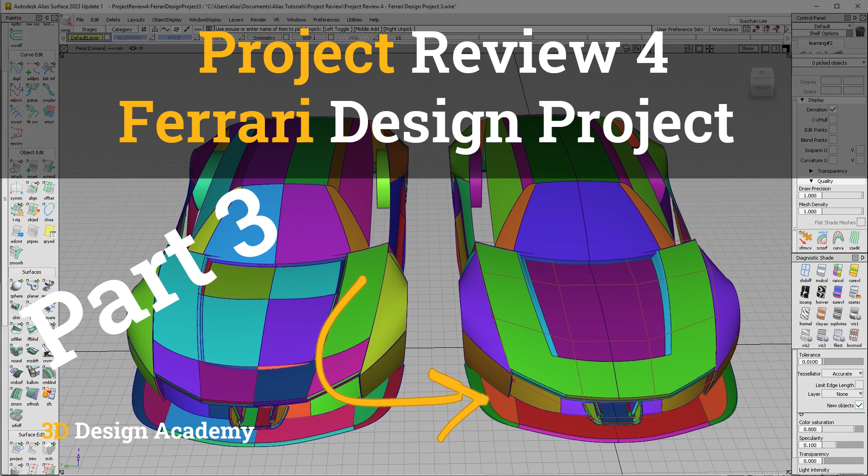In the previous lesson, I finished up by working on this fender over here. I'm going to make some modifications because there's a little bit of gap between the surfaces. I'm just going to leave this edge as is.

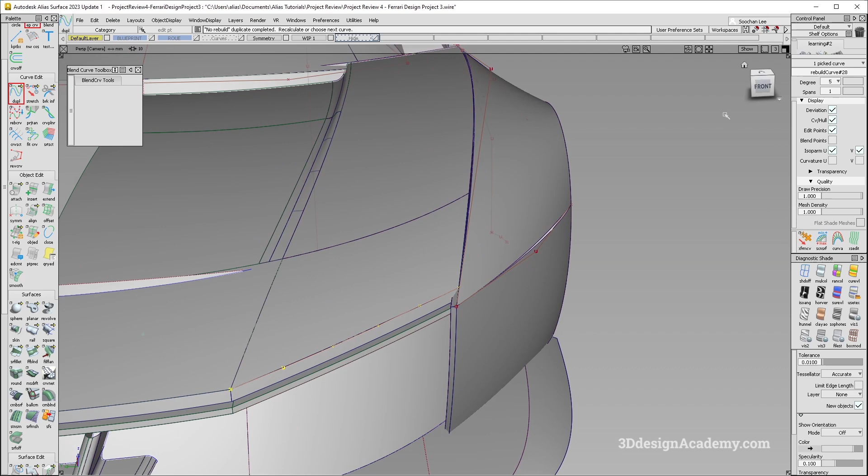I'm just going to duplicate this edge. Actually, let's see if I can extract the curve. Looks like the top one doesn't really have it, so let's do a fit curve like this. I'll make it a degree 2 to keep it simple, and do the same thing over here as well.

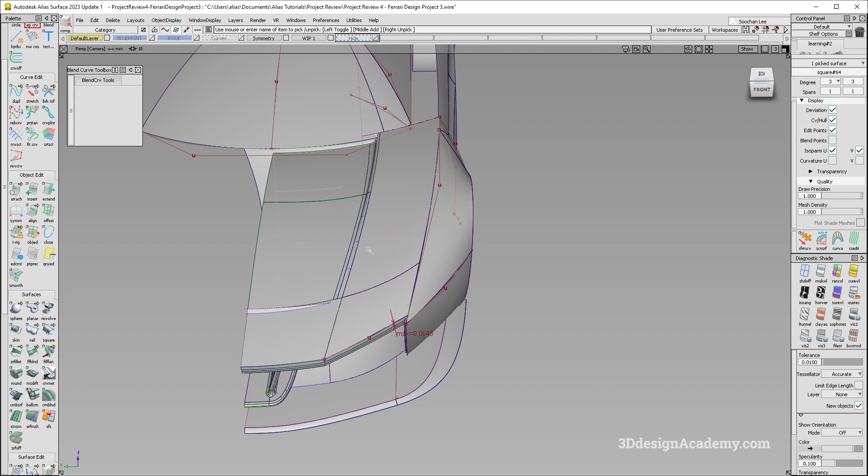Actually, I do have a surface over here, so I'll just use that. Now what I'm going to do is recreate it, because I have to refit the existing edge to the new one. I'm just going to delete this one and do a bi-rail.

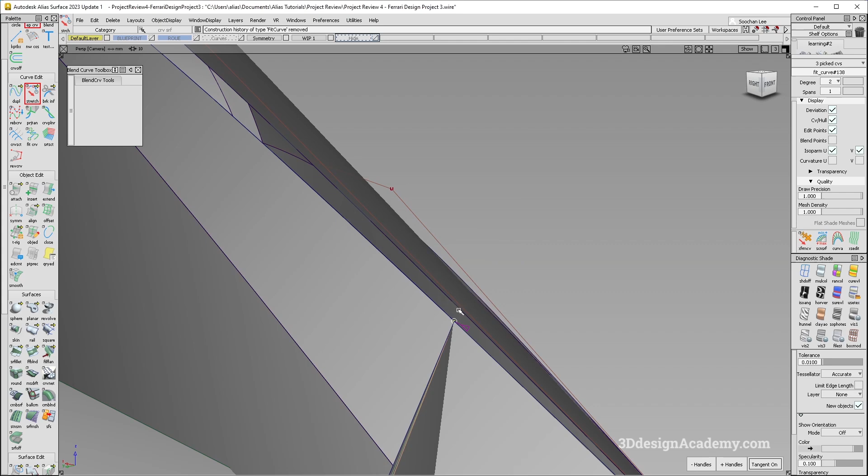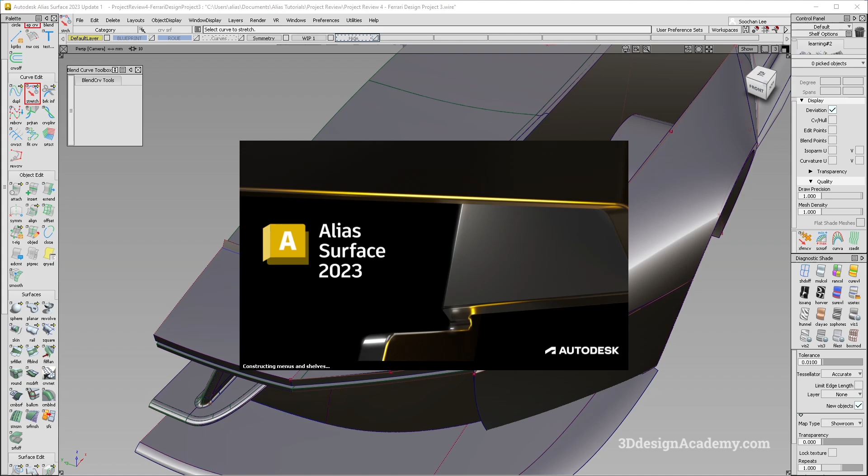I can't remember if it was supposed to be curvature or not, so let's start a new session of Alias and bring the previous one back just to check it. I shouldn't have deleted it, so let's just bring the other one.

I'm just going to check if it's supposed to be curvature or if it's supposed to be something else. Okay, so it looks like it is supposed to be curvature, which means I will probably make it out of one sheet. Let's just check the continuity over here. Okay, so it doesn't look like curvature.

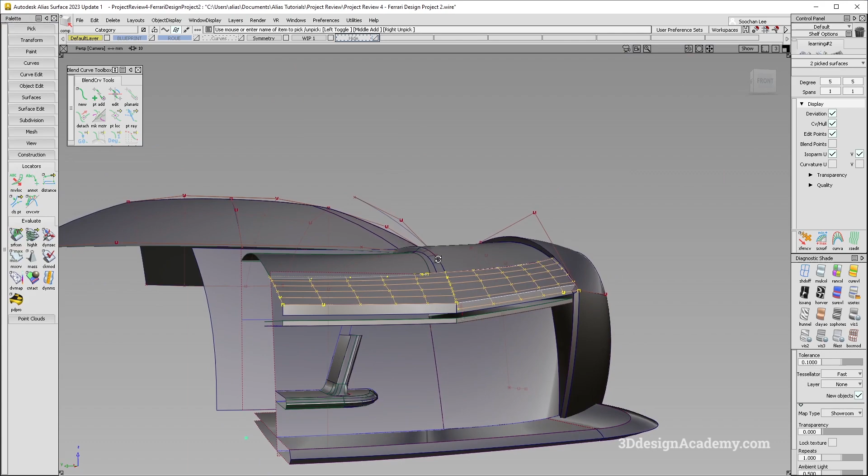In a case like this, I would actually build across the center all the way through, but... okay, so this one, that's a little bit interesting how it's built. Okay, so let's do this.

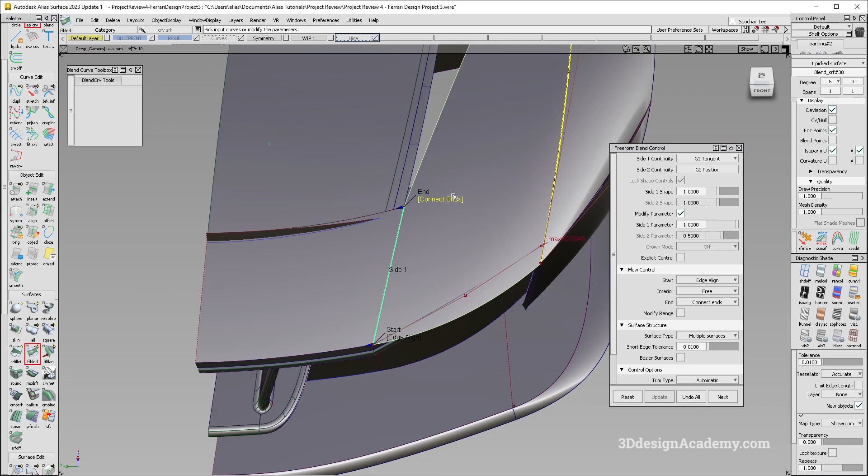If that's the case, what I'm going to do is align a freeform blend and go align it to this edge over here. I'm just going to say connect ends, I think connect ends will be best. And I'm going to say modify range, and bring it over here like this.

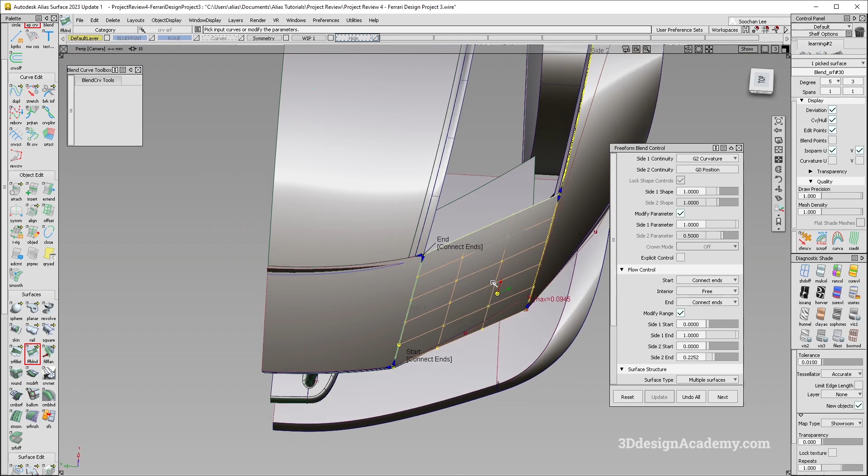For this one, you can do connect ends, it doesn't really matter. What I'm going to do is make sure that it's curvature on side 1 and position on side 2. Now that's where it looks like the CV structure is a little bit off. I don't know why it's doing that, could be because of the underlying structure over here.

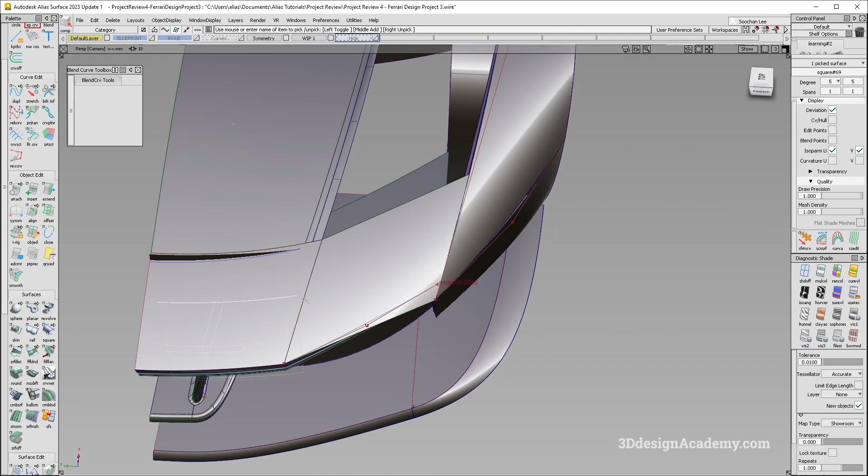So yeah, let's just leave it like that. Now, because of the difference here, it's probably going to rise up a little bit as it goes towards the outboard side, which is fine. But I do see why the creator of this model made a decision to patch this into 2 pieces. So if that's the case, I'll just leave it.

Let me just bring this down though, and delete the COS over here. Now, to recreate this edge, the only thing you have to do is just project, and I'm just going to go ahead and trim. In order to fill this space in, I'm just going to use a bi-rail.

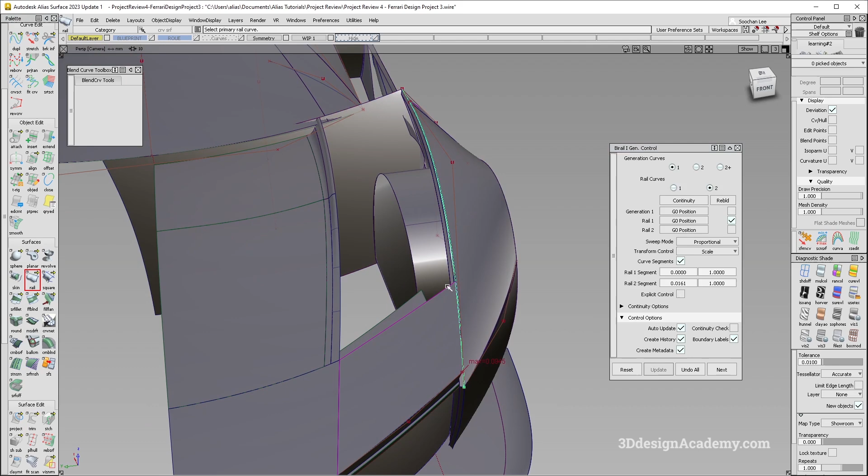So it's going to be 1, 2, and 3 over here, like this. I'm just going to use a curve segment to bring the edge back to essentially a similar location like that.

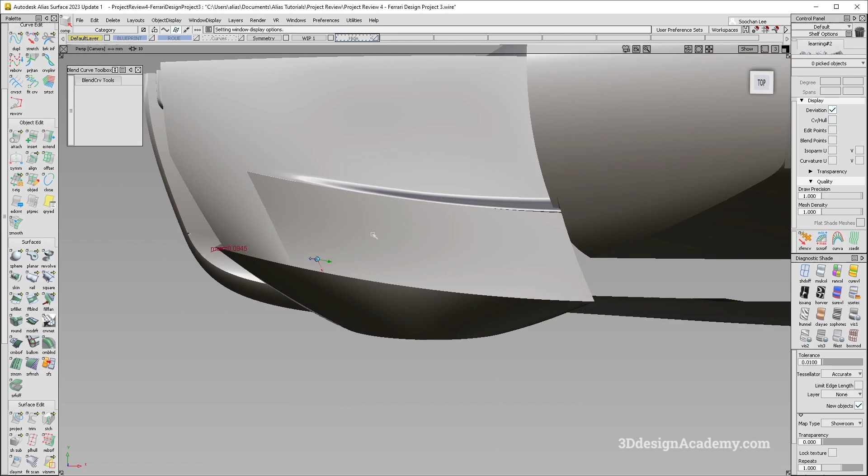However, with this one, you do have to be a little bit careful, because this does have to be curvature lined. Actually, if that's the case, let's do this. Now, here's a little bit interesting part. Actually, if this is the case...

This is where things get a little bit tricky. If I was to just make the whole thing out of one sheet, I think this would have been easier, but because it's actually segmented, I don't know if this is the best approach. So let's do this.

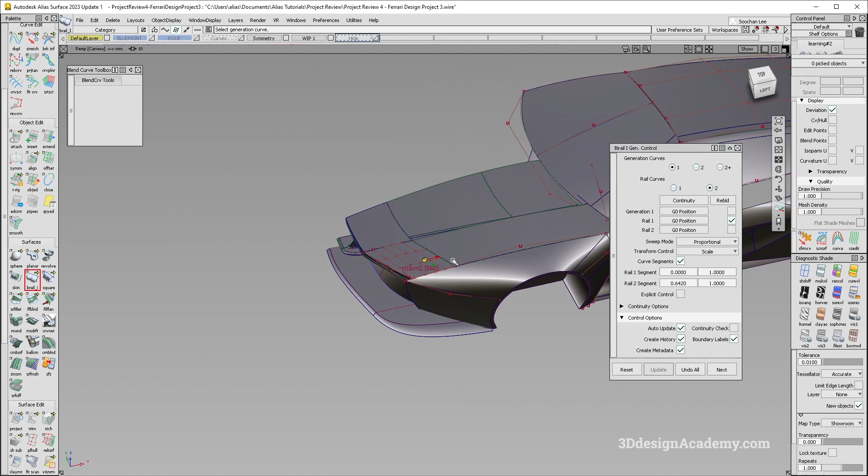I think I'm going to make it out of one sheet, just to keep things simple. Because right now, if I were to align this curvature, let me do an explicit control and make it out of maybe 5 degrees like this. And if I were to just do curvature on this one, it's going to sink down. Well, actually, it's not that bad.

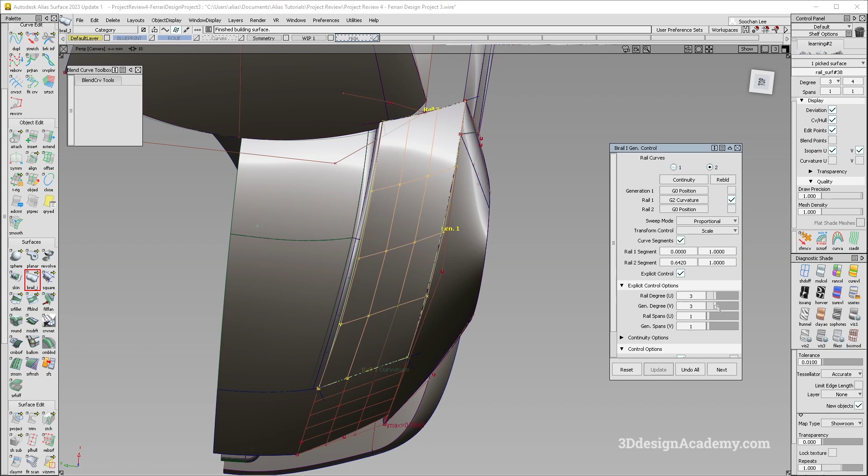Okay, I'm just going to make it out of degree 3, and this one is also going to be degree 3. Oh, okay, so it does do this. Yeah, never mind. Well, if I actually... it would be ideal if I make the whole thing out of one sheet so that it's just a clean build.

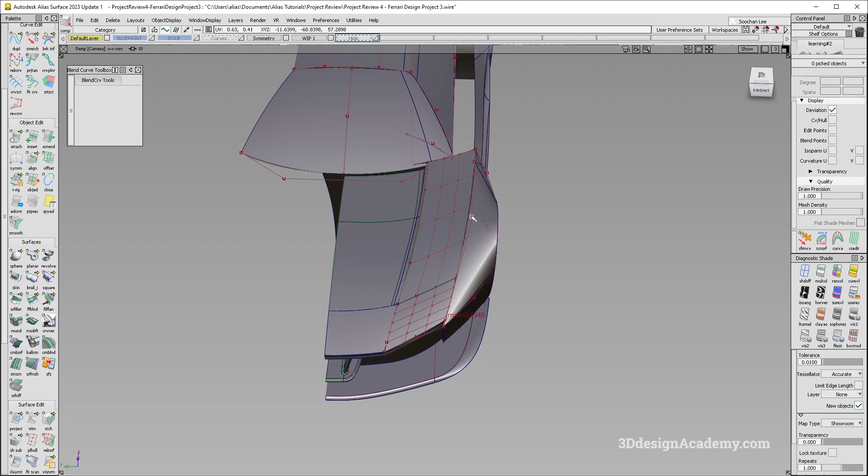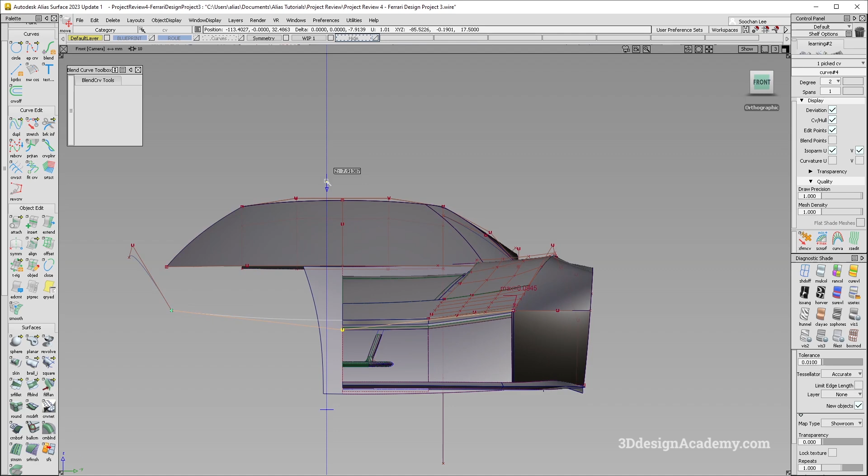So what I'm going to do first is duplicate this over onto the other side. And let's go ahead and build a curve for the front, like that. I'm just going to snap it over here, and try to mimic the front over here like this. Now it doesn't have to be exact, but it should be pretty close. I probably won't be able to make it that flat, but let's see how it does.

What I'm going to do is just do a bi-rail like this. I'm going to say 1 and 2 over here, like that, and let's take a look. Okay, so of course this is going to have a much cleaner build.

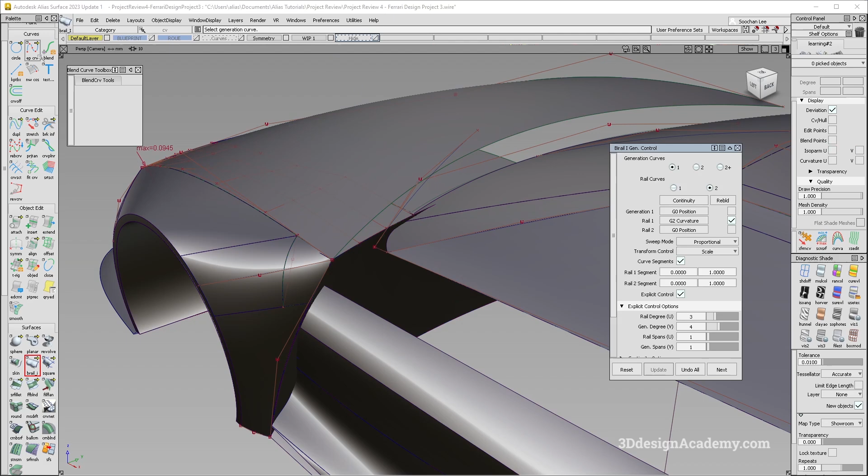Actually, you know what, I do need a curve for the back. So what I'm going to do is connect the dot from here to here, like this. And let's make it either a bi-rail or a square. But I do prefer a square, so let's just do that. Okay, let's go ahead and do that.

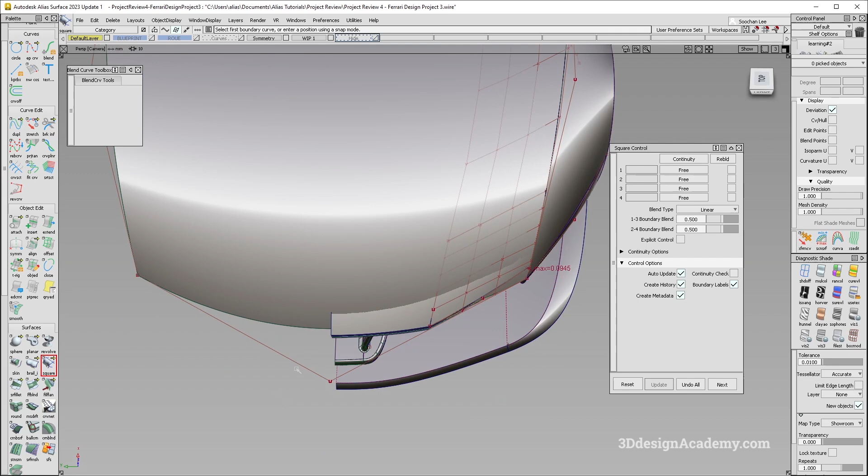Explicit control off. So what I'm going to do is control these edges so that it's close over here. I'm just going to pull it forward like that, and project from the top so that it's as close as possible. So I'm going to project over here, and over here using the curve from Z.

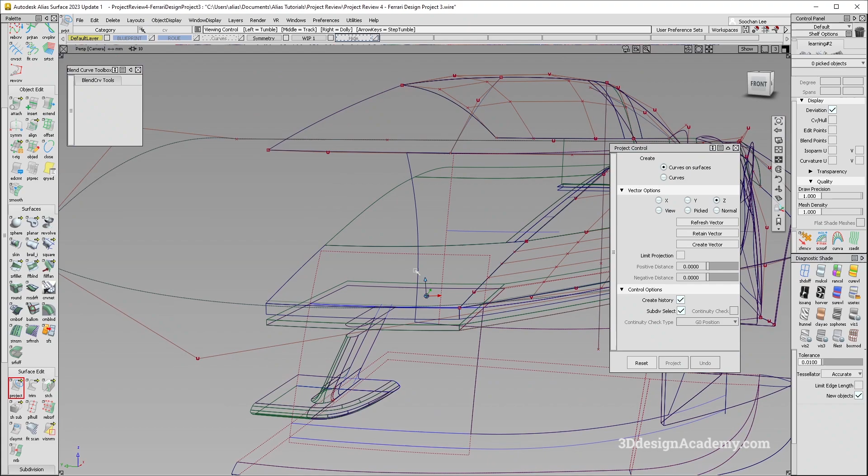I'm just going to check the location like that, and maybe bring it down just a little bit more. As you can see, it was getting closer. Okay, I think that's pretty good there. Now it's not going to be exact, but this is going to allow me to achieve a much cleaner build.

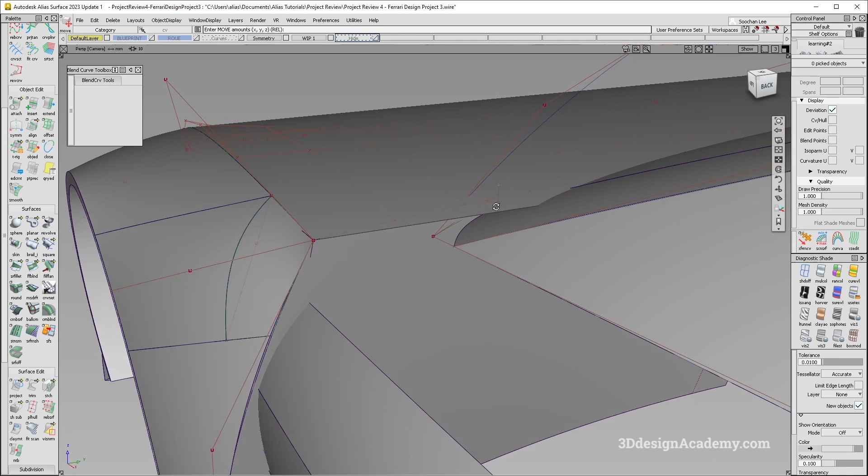Now what I'm going to do is adjust these edges over here. Let's go ahead and pick this CV, or pick this curve. I'm going to make it out of degree 2 just to keep it simple. I'm just going to drag it down until it's somewhat close to the edge over here, and I think that's pretty good.

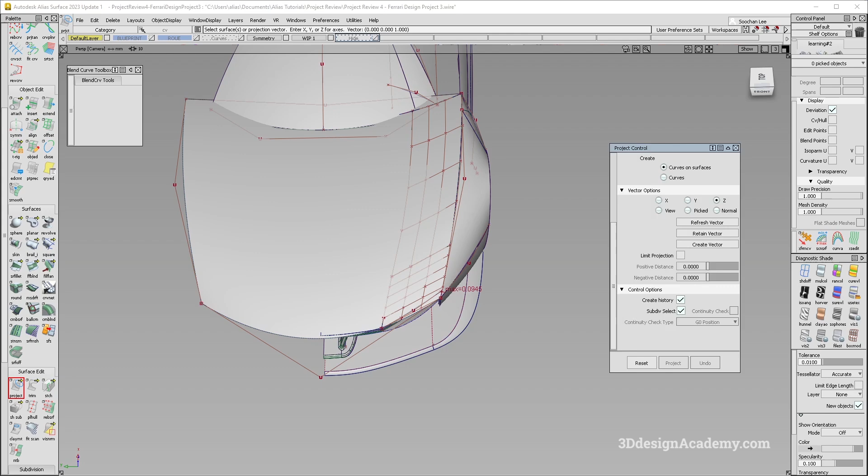So now I'm just going to project using... actually, you know what, I should probably just do an intersect. Okay, so the highlight... actually, the flow's not bad. Okay, so that's good. But I am going to chop it in half, so let's go ahead and do that.

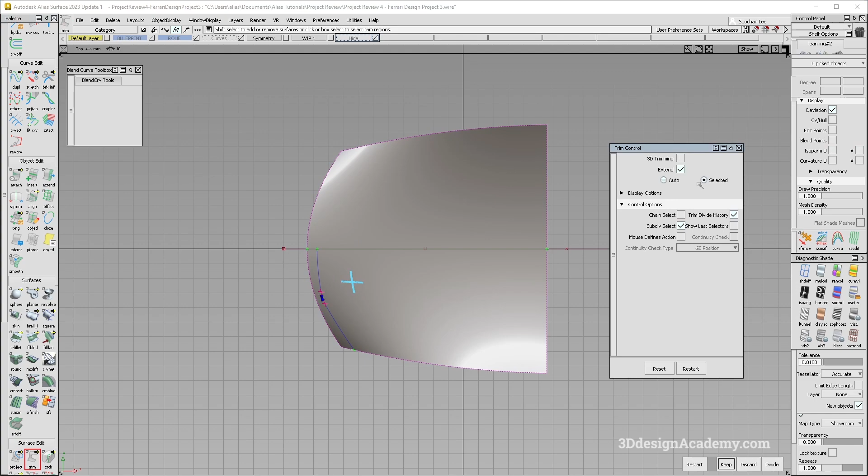So I'm going to delete construction history, and extend this a little bit over here. And let's go ahead and project like this over here. I'm just going to extend the COSs over here so that I can trim it. Yeah, that's actually not that bad. I'm kind of surprised. Okay, so now let's go ahead and do the rebuild.

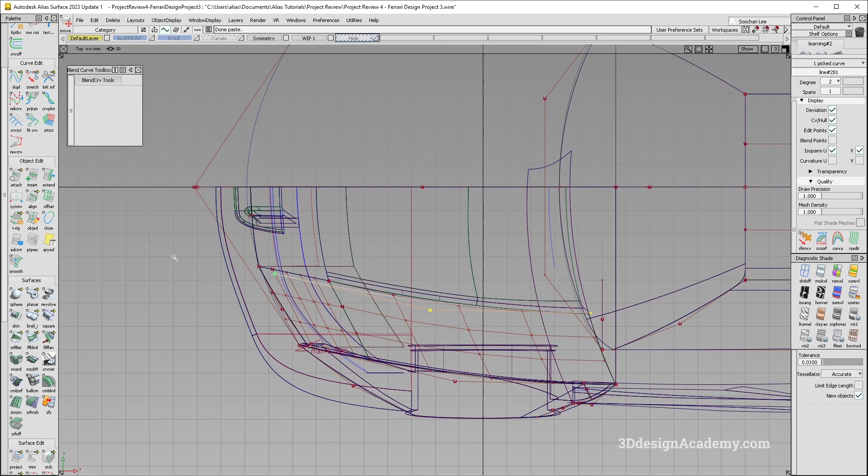Now the height of this one is going to be a little bit off, but that's okay, it's going to be a lot more natural. Now I do still need to cut it, so I'm just going to bring a COS or bring a curve over here, and let's just snap it.

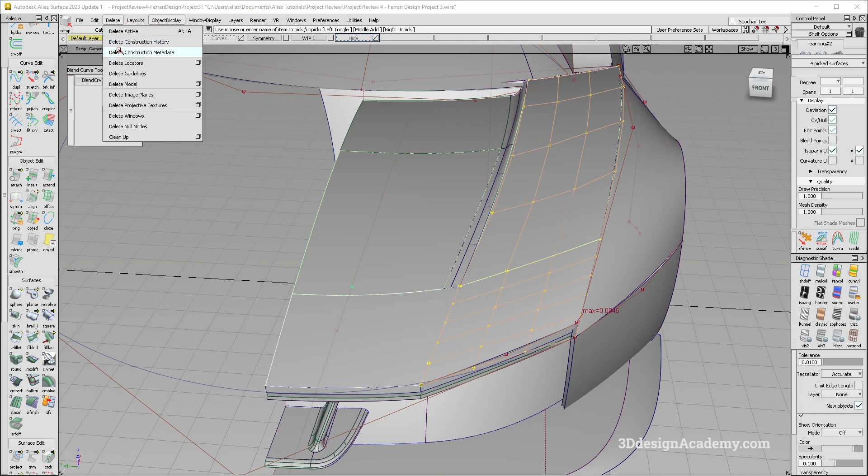Well, there's a fillet over there, so I'm just going to do a little rotation like this. And this one I'm going to retain similarly to where it is before. So let's do this. I'm just going to hide these, making them invisible.

I'm going to retain that, but let's just go ahead and hide these surfaces over here. Okay, so now, oh, actually, I should retain that. So what I'm going to do is, for the front edge, I'm just going to do a COS and do an insert. Now, that's it, however, I don't think I see the front.

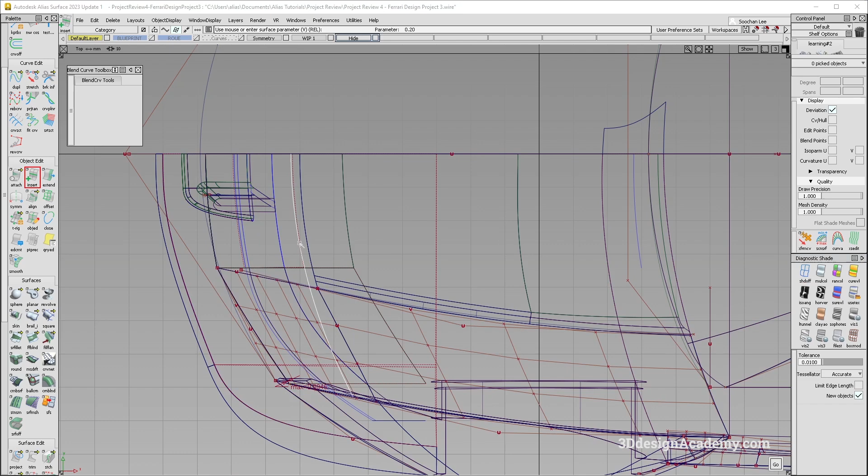So I'm just going to grab this from the back and transition from somewhere around here. I think that's good. I'm just going to extend this one back like this. And let's go ahead and use this curve over here to project from the top. So I'm just going to project like this, and of course it does have to go all the way through the end.

So I'm going to go ahead and just extend this one.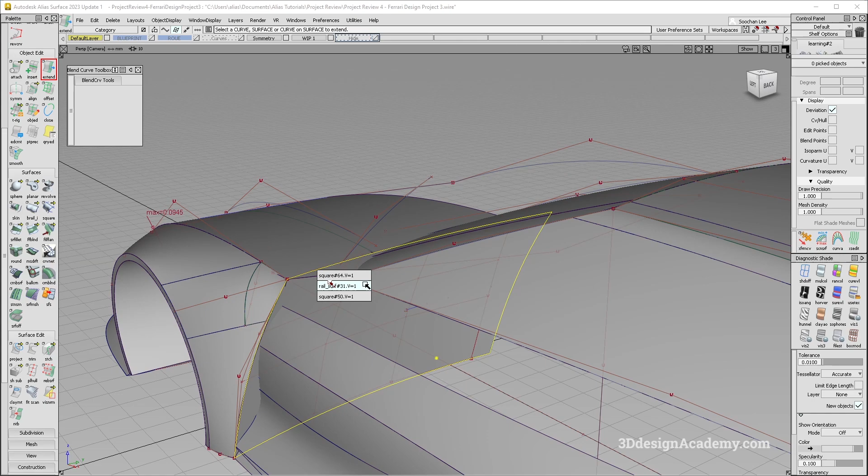I don't know why there are two surfaces there. So let's just go ahead and delete one of them. Oh, actually, I like the other one better because this has too many. Oh, I keep grabbing the wrong one. Surface delete. I'm going to extend this one.

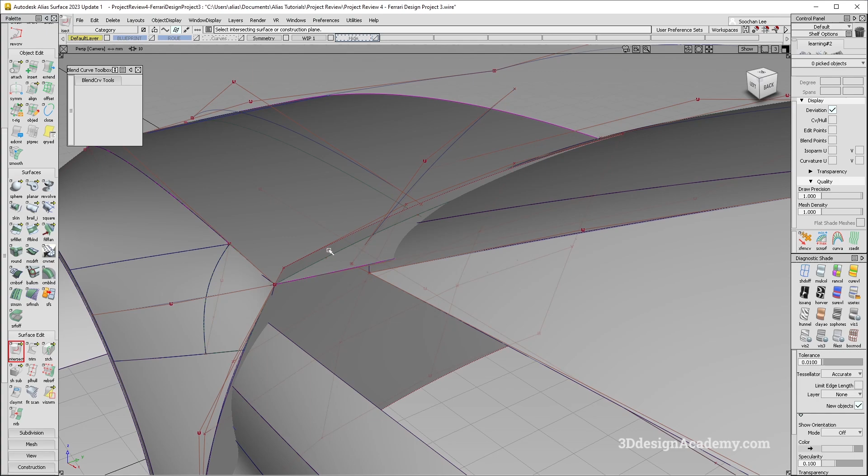I'm going to go ahead and intersect over. Oh, I don't want mapping. Go ahead and intersect it like this. I'm going to trim this piece over here. And I'm going to trim this one.

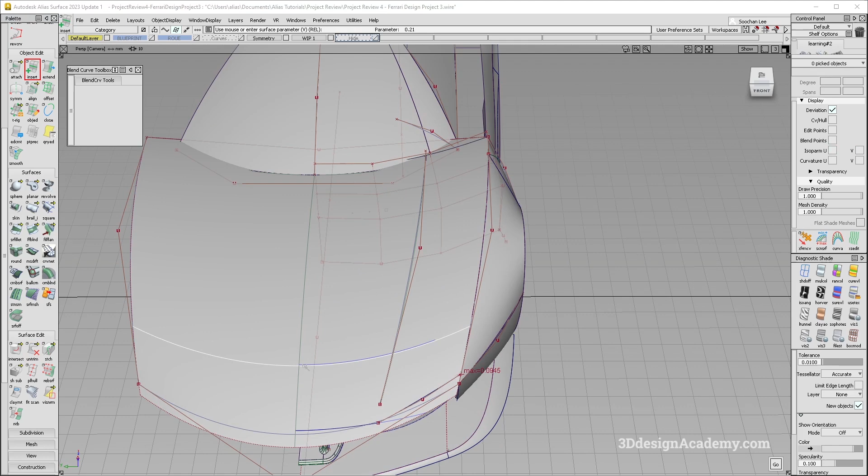Now, before I trim that though, this does have a little scoop kind of like shape. So what I'm going to do is, well, there are several methods, but this is the one that I'm going to be using. Actually, before I do that, let me just untrim it first. And I'm going to do an insert again. Just get it close. It doesn't have to be exact because it's going to be curvature continuous anyways.

And I'm just going to go ahead and duplicate onto the other side. This one I'm going to delete for now. And let's just project this from the top, from Z, like this. Actually, I should go ahead and do this one too. So I'm going to say edit duplicate mirror. And I'm just going to go ahead and project it from Z again.

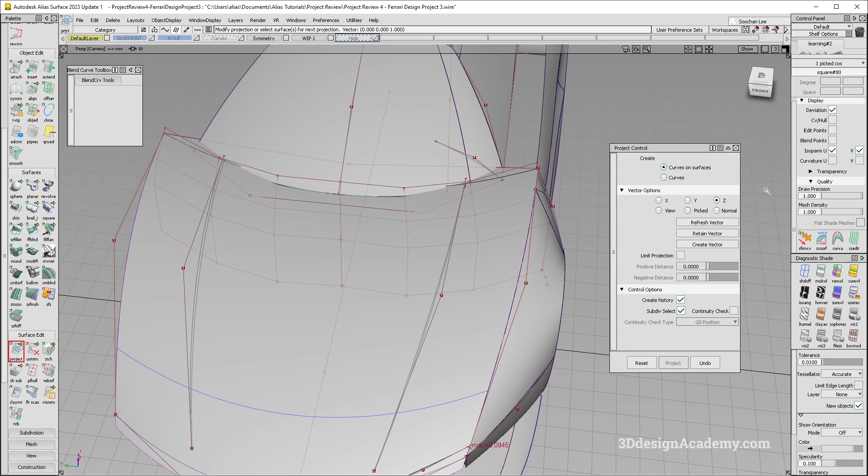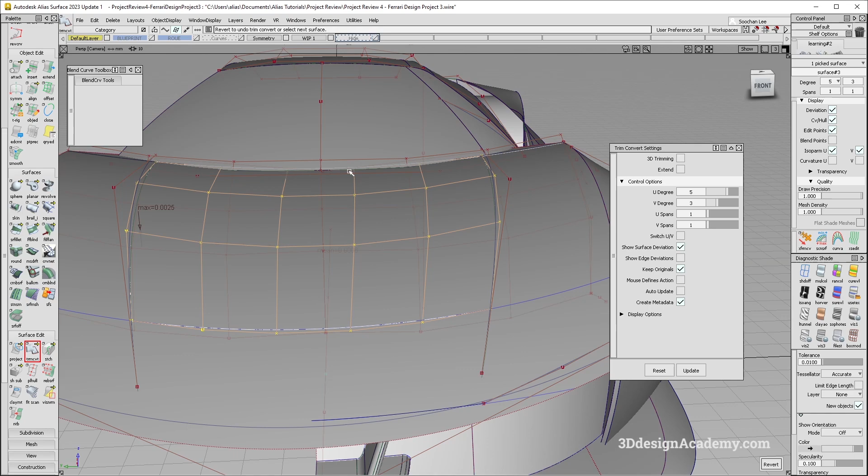And now I'm just going to do a trim convert like this. There we go. And let's just go ahead and show surface deviation. It's not exact. So what I'm going to do is I'm just going to crank up the degrees like this, maybe 4 or 5. What you want to do is you just want to make sure that this is degree 3, but everything else is pretty close, because I do want to retain curvature on this one. Okay, so I think that's good.

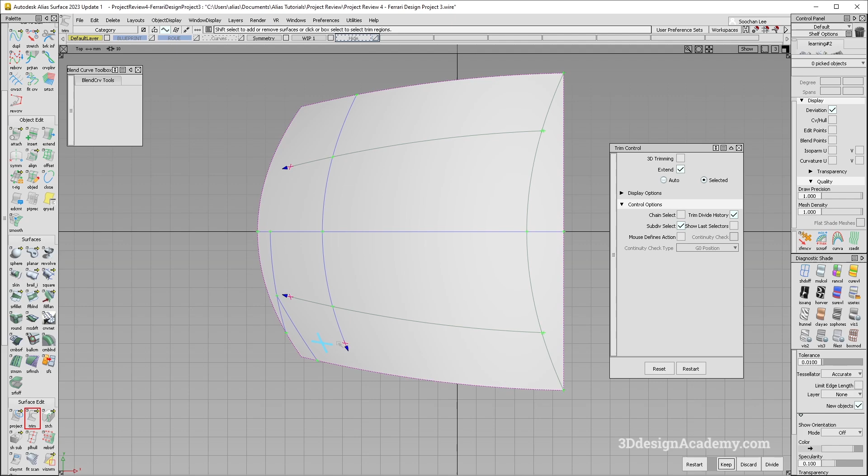And what I'm going to do now is trim it back. So let's just grab a curve over here like this. And I'm just going to project. And let's just go ahead and extend that back a little bit and go ahead and trim. All right, so that's good.

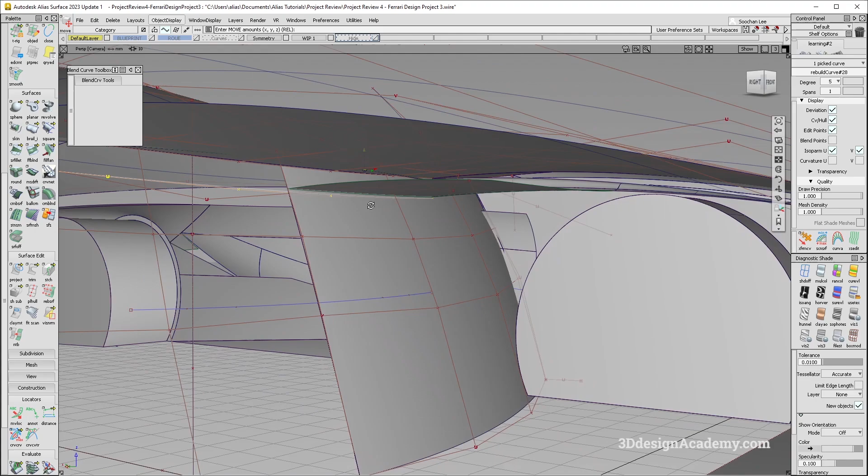So now, here comes the neat part. In order to create that little scoop-like shape and the washout over here, all you have to do is just duplicate this edge. Well, you do want to make sure that it's curvature though. So let me just do that. It's curvature. That's perfect. I'm just going to bring this down to whatever height is desired. Let's use this as a reference. So I think that's pretty good.

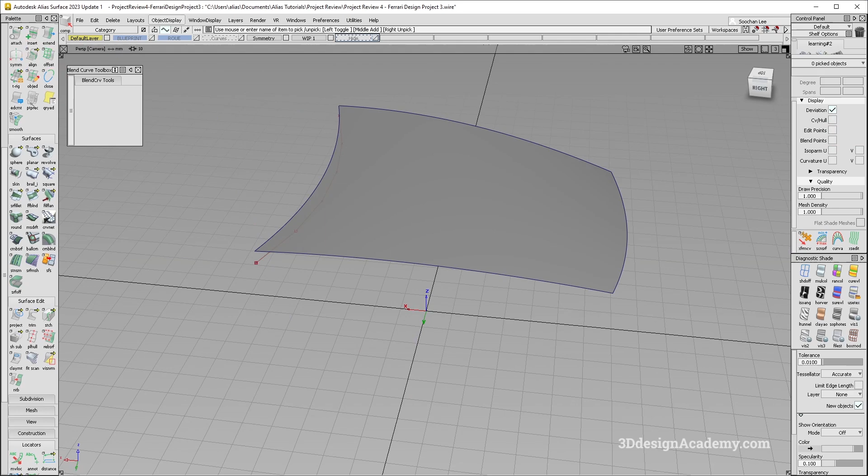So now all you have to do is, well, first of all, let me just delete all these. Actually, this one I'm going to put over here. Yes. Oh, there it is. Okay, so I'm just going to go ahead and select position, align, and that's all you have to do. So now you got a nice progressive washout over here.

Now, depending on how aggressive you wanted to have it, of course, I did bring up the volume over here, so it's going to be a little bit different than the previous one, as you can see over here. If you want this to be a little bit more aggressive, you can always increase the number of degrees to 4 or 5, and just do a blending in 1 and 2 like this to have a little bit more dive down over here as well.

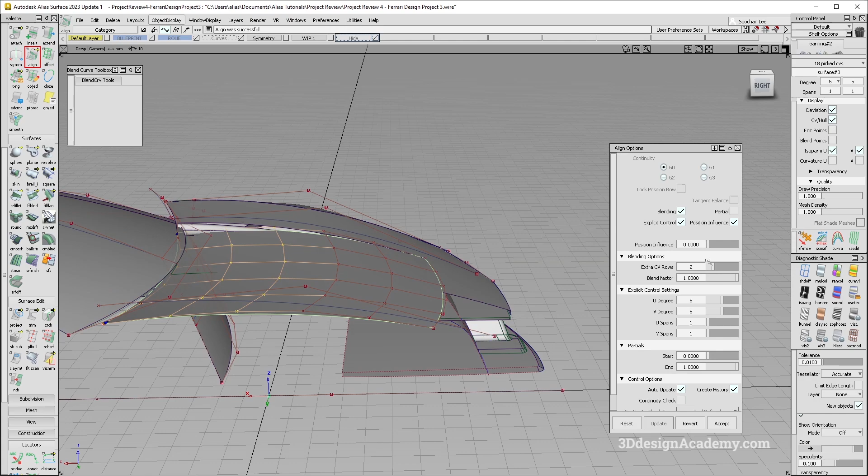Really up to you. Or if you want it really linear, just a progression over here, you can just make this position and just put a filler between the two. But let's just go ahead and take a look at this. I do think that it's diving down like this, so I'm just going to keep whatever I have like that.

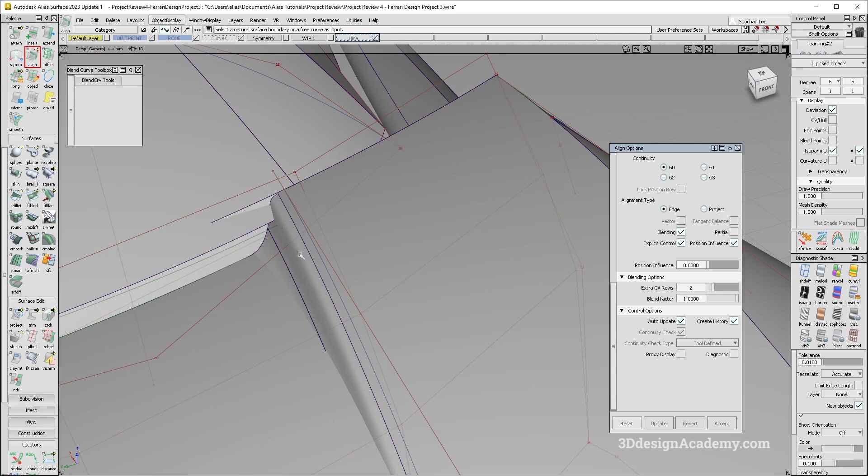All right, so now I'm going to do a fillet. Now, if you don't want to fillet it like this, that's fine. But if you're going to fillet it like this anyways, I think there is an easier way to do that. So I'm going to show you guys 2 methods. I'll do the easy one, and I'll do the Y fillet one too. Actually, you know what? For this exercise, I think I've done enough Y fillets.

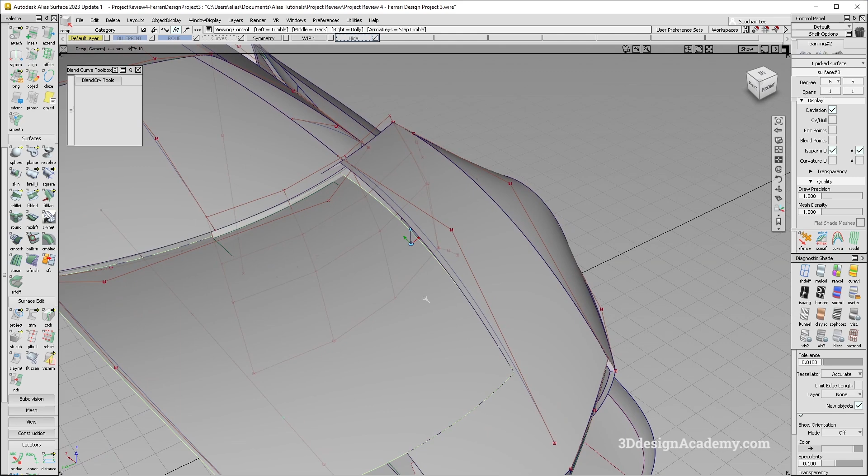So let me just show you a very easy way to do this. This is probably not class A surfacing, but it's easy to achieve a design fillet. Okay, so first of all, let me just trim this one because I don't really need it anymore. I'm just going to go ahead and trim, and let's just delete the construction history like this.

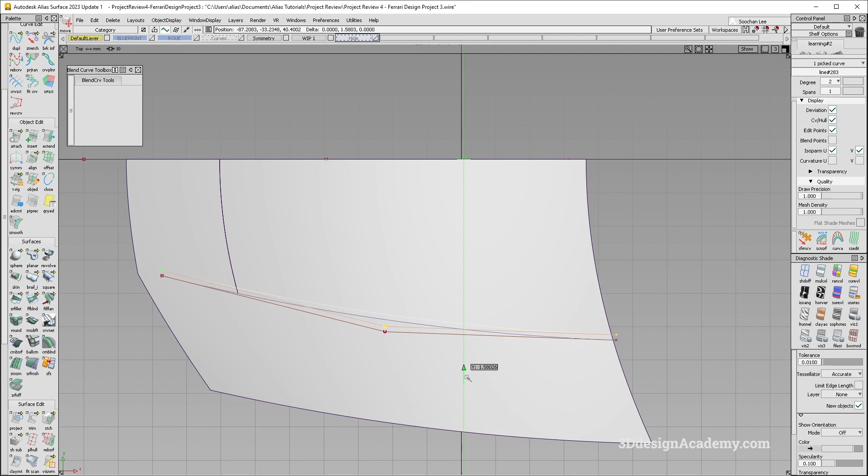What you want to do is copy and paste this curve over here and just move it out like that. You can do a little bit of rotation like this, depending on how smooth you want the transition to be, and just project it like this. Now, what's important is you copy and paste these curves so that they are complementary to each other. Same thing with this one. You want the surfaces and the distance between this one and this one to be complementary, very family. You want a family of curves.

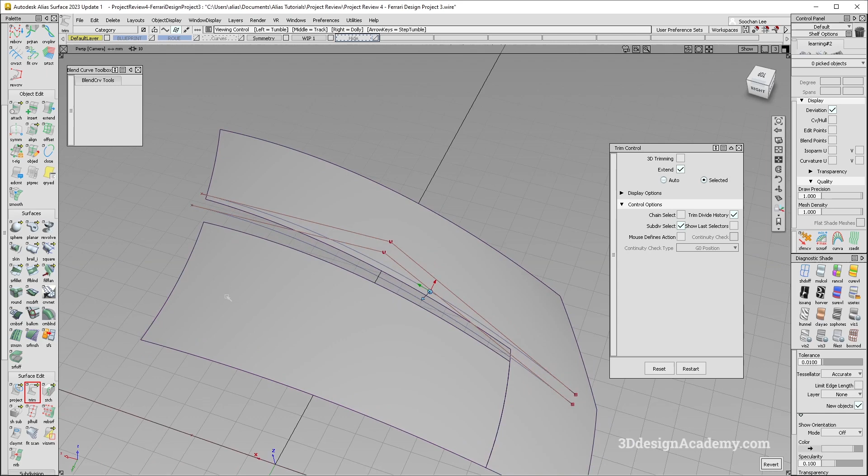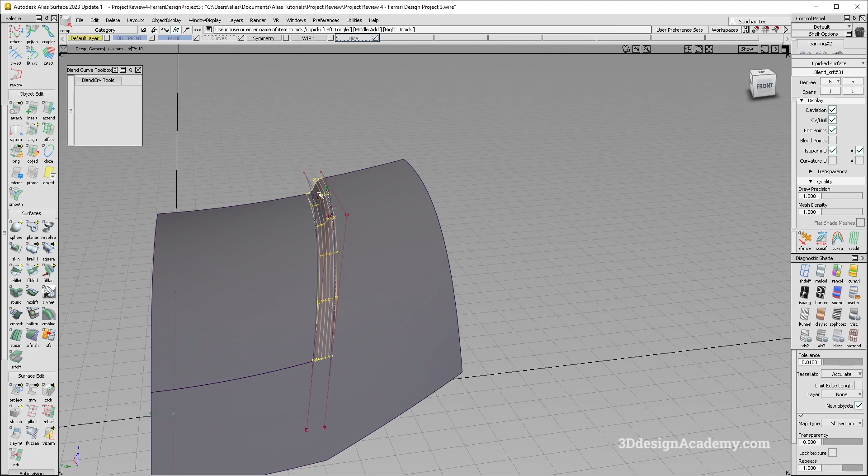All right, so now that's done. All you have to do is click this one, click this edge, and do G2 on each side, and that's it. This is a very easy method, and to be honest, it actually highlights pretty nicely. As you can see, the washout is really nice. I would actually prefer the Y-fillet method, just so that I can control the fillets nicely. But if you're in a hurry and just blocking it off, this is all you have to do. So super nice and easy.

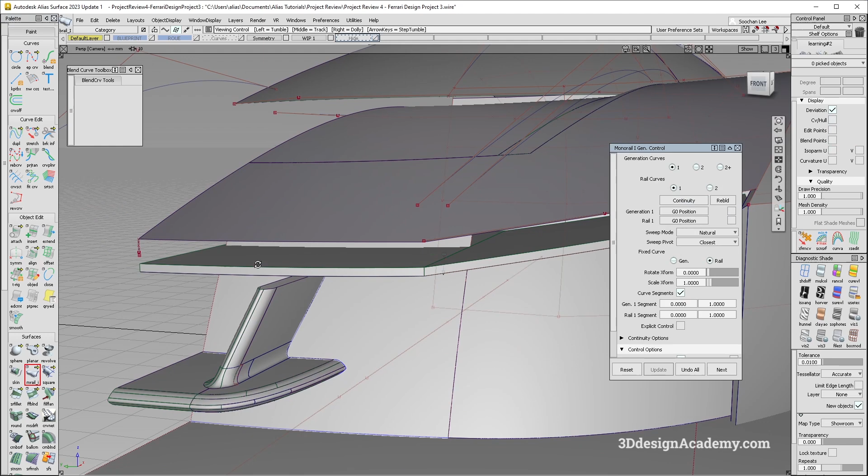All right, so I think that's it. Of course, you do have to realign all of these surfaces over here. So let me just do a quick rail. I'm going to say duplicate over here, and do a one-on-one. Let's go on a rail here. Oh, looks like COS, so you want to make sure that it is actually positional. Same thing over here. And that's it, you get your design back. The surface structure is a lot cleaner, so much better overall.

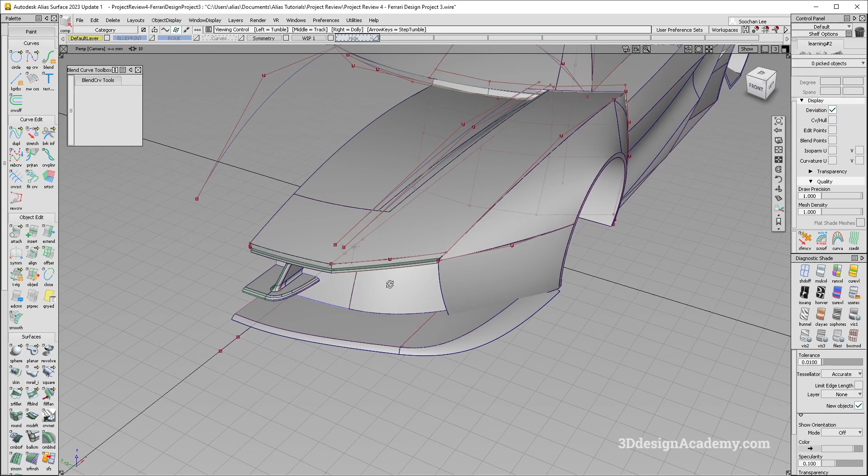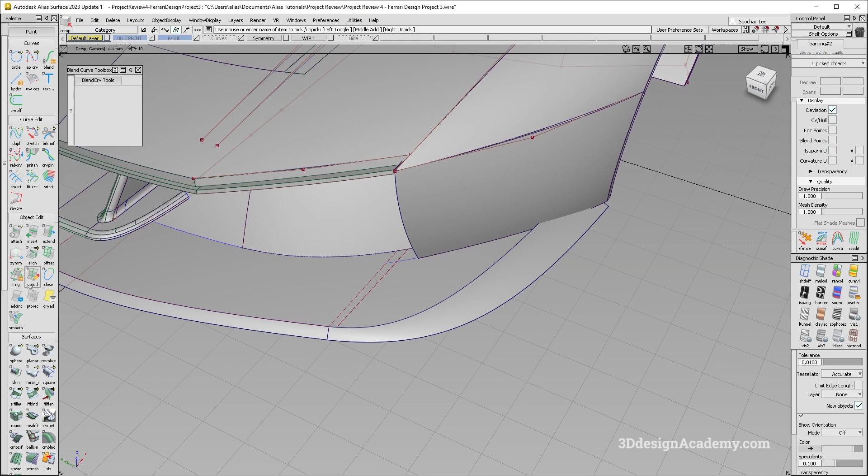Actually, before I finish, let's just do this. If you look at this one, you'll see a weird shading over here, and that's because there are multiple CVs joined at an edge. Essentially, you're making a triangle, which is not desirable. There are a couple of things you can do. The easiest method is to just delete it. Actually, let me just hide it like that, and just run a rail, parallel like this. That's all you have to do. Now you actually have a square, a four-sided edge.

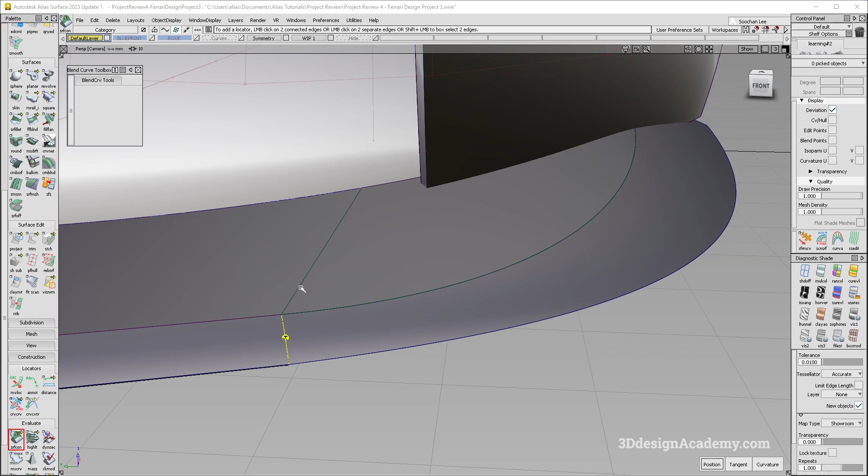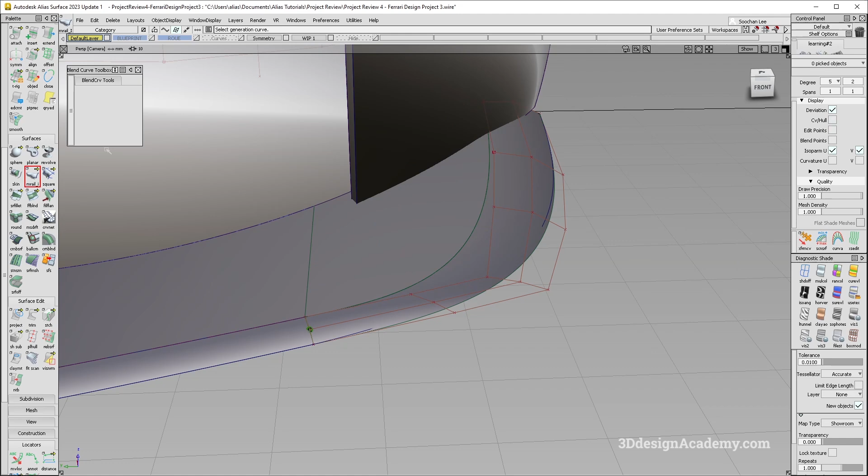Let's check the continuity. Okay, it looks like there is a little bit of a continuity issue, and I think it is because of this one. You want to make sure it's curvature. I'm going to grab this one and make a curvature edge like this. Looks like it doesn't work, so let's go ahead and align, partial. I think it might be due to the number of degrees, so let's crank it up. There we go. It's actually curvature, and the highlight flow is nice.

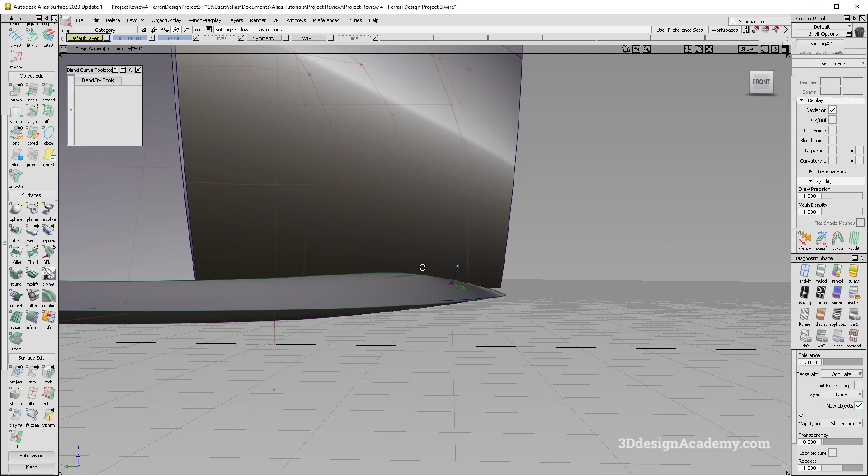If you are concerned about this, you can always create a curve too, but I think this looks good enough. Actually, let me just check if it's intended to be flat. Okay, so it does have the same structure. So I think that's good.

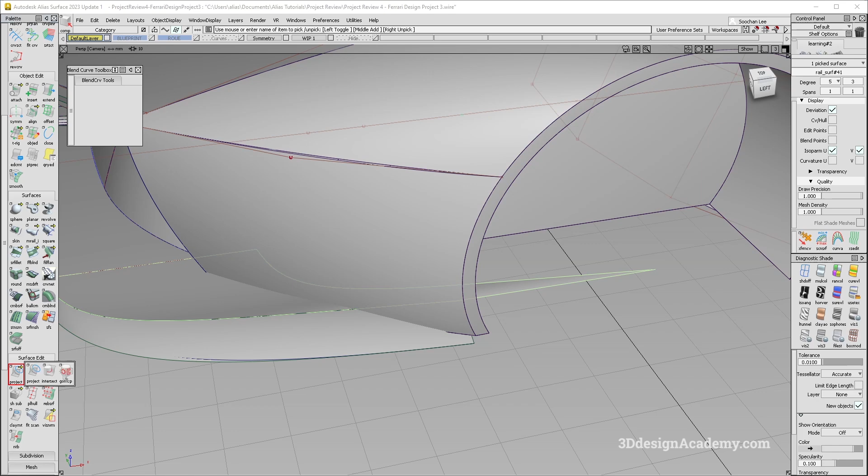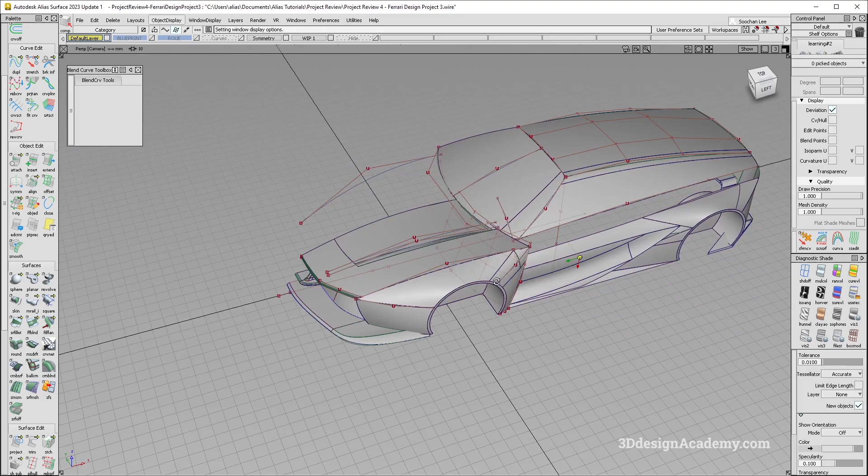As a finishing touch, all you have to do is trim this. Since this is blocked off over here anyways, I'm just going to grab this one, snap a curve like this, and project from the top. And that's it. Other areas look pretty good, so I don't need to go into that. But that's how you would essentially fix up a design model. So that is the final part for the Ferrari design project review.